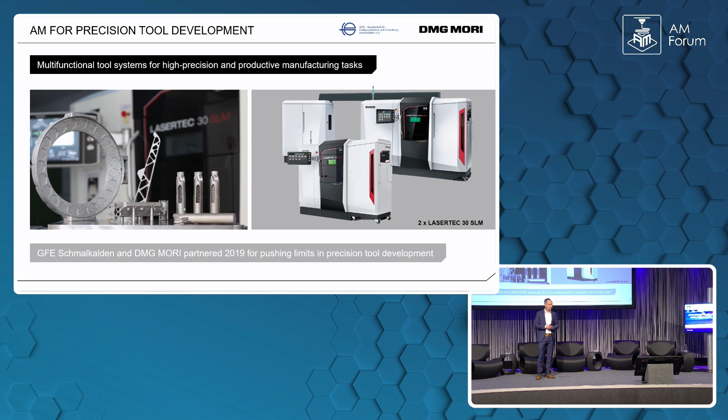Therefore, we have, I have to say, a huge shop floor. In this shop floor, we have around about 25 machine tools, and among them, as Mr. Lell said, 2 LPBF systems. These are the LaserTec 30 SLM. And what you can do with them regarding the performance optimization of tools, I will show you on one example,

more or less. This is a power skiving tool, and when we are talking about tool performance, we have to ask the question, how can we measure the performance? And that could be even measured in productivity. So for high productive tools, you need stability, you need rigidity, you need wear resistance, you have to focus on economical and ecological tasks of these tools, and of course, you have to look at precision. All these aspects I try to put together in one demonstrator.

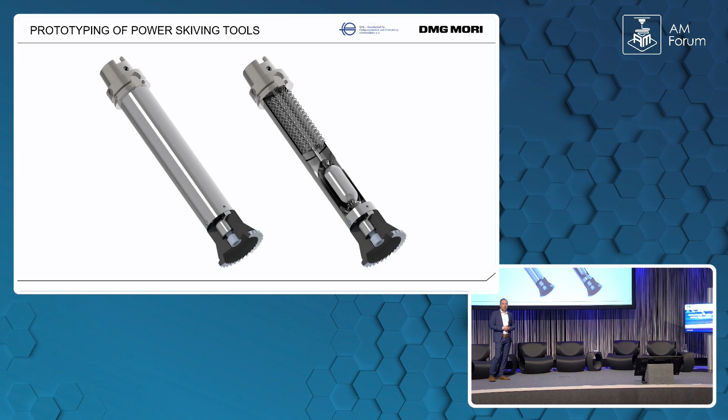You can see on the right-hand side, there are different optimization tasks we can follow on the road to optimize these tools. I will go on, and this slide is maybe the key of my presentation. Here you can see the different opportunities, and that's what every tool supplier is interested in. Having a look at the first area, that's the tool interface. And the tool interface in this case is an HSK. Standard tool interfaces to clamp the tool on the spindle or the tool holder, etc.

These are standard parts, and when we're talking about standard parts, you don't have to print them. So in this case, we have to think about hybrid manufacturing. It's a topic that's not new, but that's our task. We're thinking about hybrid manufacturing in the context of additive, subtractive process chains. In this case, subtractive, additive, subtractive process chains.

The next part of this tool is the tool shank. Here, I guess we have the very innovative topic on that. It's first of all lightweight construction, lightweight design. That's an issue regarding economical tool design, of course, and the other part is function integration. Here we're trying to implement damping systems, and I would like to talk about that later on a little bit more in detail.

Then the last area is the tool head. Of course, you can see some topology optimized tool heads with cooling lubricant supply outside. For example, the company Sandvik has presented these heads. I won't talk about that. That's from its stand. It's state of the art.

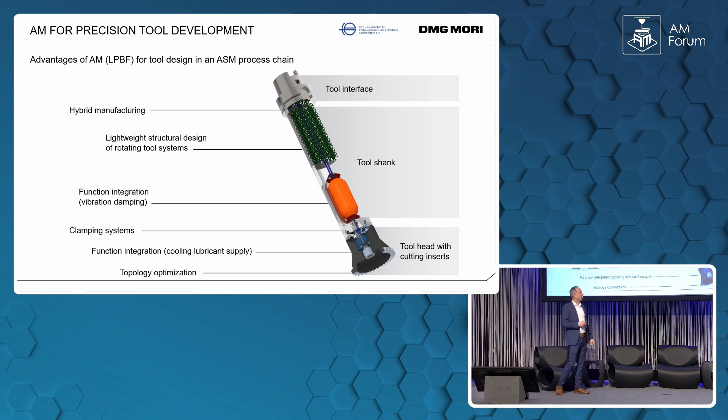But really interesting are clamping systems. And here we're talking about hydraulic clamping systems, and that is a really benefit for damping and, of course, for time-consuming tasks in machining. Okay, so these are several projects, and I will just highlight some topics.

Hybrid machining. So when we're talking about hybrid machining, we are using zero-point clamping systems. These are thermal zero-point clamping systems from the company PL Lehman. It's really beneficial. You can put the build plate from the SLM machine to a 3, 4, 5 axis machine tool, and so we are really productive. But if you want to go on in hybrid, you have to mount, for example, these tapers, HSK, what you see in the middle of the picture.

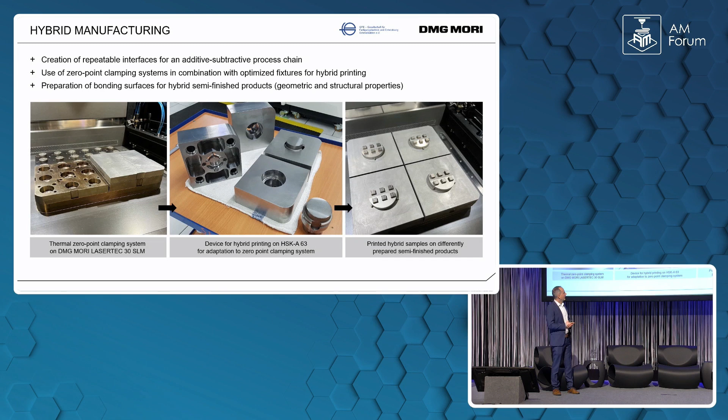Therefore, we have designed a special device. We can put them in the middle, and we did some R&D on the optimization of hybrid manufacturing. That means how we have to prepare the joining surface. That means we have to generate a certain RZ value or roughness. I can recommend the RZ between 2 up to 6 micron. That's really beneficial. Of course, no glossy surfaces.

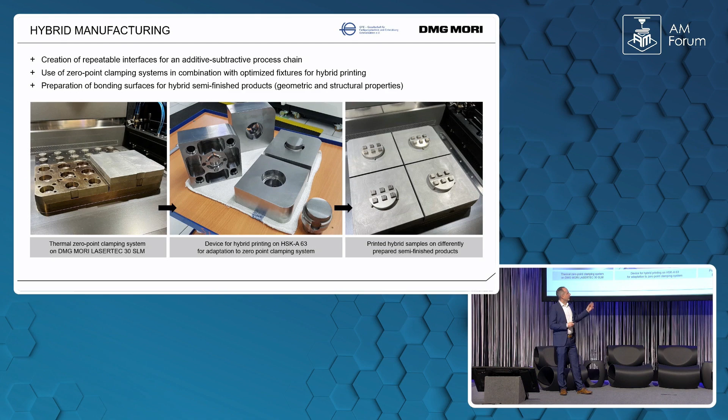You might know that. On the other hand, it's interesting to have a look on the joining strategy. That means how to scan the first layer. That's really important. Here you can recommend a multiple scanning strategy, but then it will work. On the other hand, the next question is how to ensure the right positioning. I will just show you this slide where you can see we have developed a certain positioning strategy.

It's a calibration strategy where we are marking the build plate, and we are measuring these marks, and so we have a deviation, and we compensate this deviation by a Python script we wrote, and so we can shift the component within the software. And here, by this task, we can achieve a precision or accuracy of around about 10 micron.

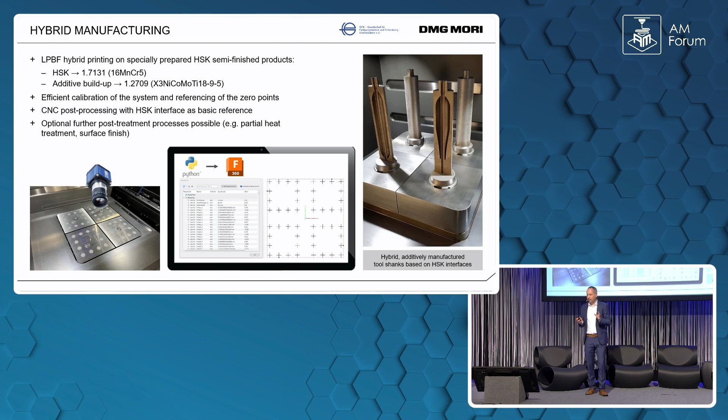That's what we could do in a laboratory, but I guess it's this direction what could be also done in industry. I heard it's really challenging to do this, but with our device and so on, it works. The whole calibration technology will last around about half an hour up to an hour. That's not that beneficial, but for precision, really good.

Next part, just to give you a clue of what is inside of the potential, I would say, lightweight construction of rotating systems. I would say highly dynamic rotating systems, around about 20,000 RPM. We have devices to test tools up to 100,000 RPM. In this case, we had the challenge to minimize the weight up to 50% by no significant reduction of rigidity or damping aspects. That's a really hard task, you know, you are shifting the eigenfrequencies and so on.

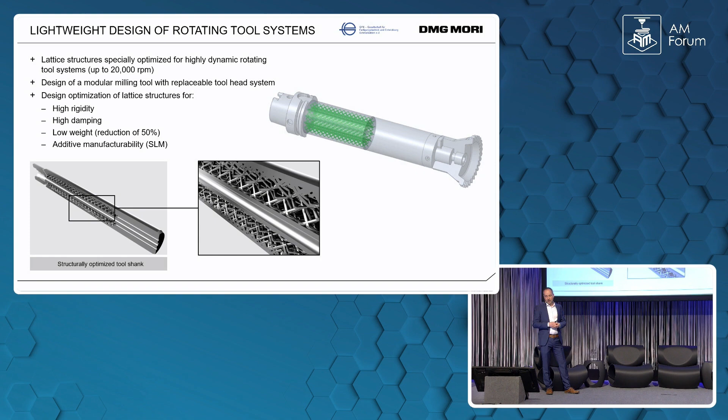But the main topic on that project was to use the lattices, the lattice structure, design lattice structure, and you might know that you have to deal with big data, in this case for the CAD models. So we want to use scalable models or implement scalable models and to define design rules. Even printing these lattices, some aspects on the dimension. There we can see 200 micron is really beneficial for these lattices.

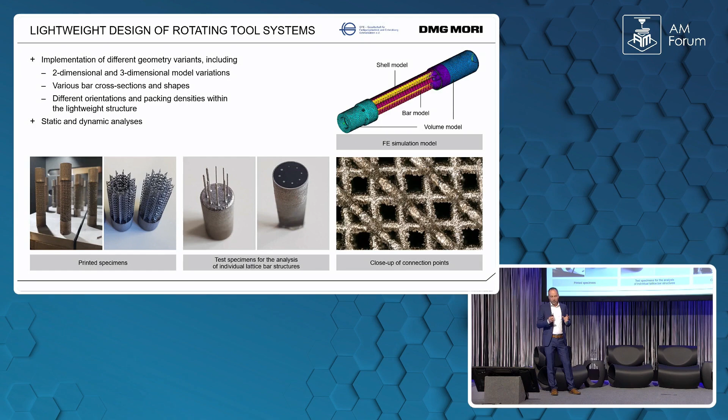We tested them, simulated them together with an R&D institute, and then we printed these specimen, these prototypes, and tested them really static and dynamic. And I have to say, it works, but you have to look at the dynamic stiffness. That's really a problem. And to compensate this, I come to the next part. You have to use damping systems.

A lot of modular tools in the market. There are, on the right-hand side, you can see, mounted with some dampers. You can see in the middle, it's a damping mass. Then you have the bearings. These are elastomeric bearings near the tool head. And by applying an axial pressure, you can pre-tension these bearings, which means you can shift the eigenfrequency, of course.

And the challenge was, or vision, aim, I know it's a running project, to implement this as a function integration in a monolithic tool. You can see on the right-hand side, and the solution to create a mass, no problem, to evacuate the powder, no problem, but how can you create elastomeric elements by a metal printing process?

Therefore, we are thinking about solid-state joints. These are springs, what you can see on the right-hand side. That's even no problem without lattices and so on, a support structure. But the other topic was how to pre-tension these springs. And here I can build a bridge to the next step, as I said. It's hydraulic actuation. In the middle of the picture, you see these chambers, pressure chambers. We applied them just to pre-tension each of these springs, and therefore to fine adjust the damping properties.

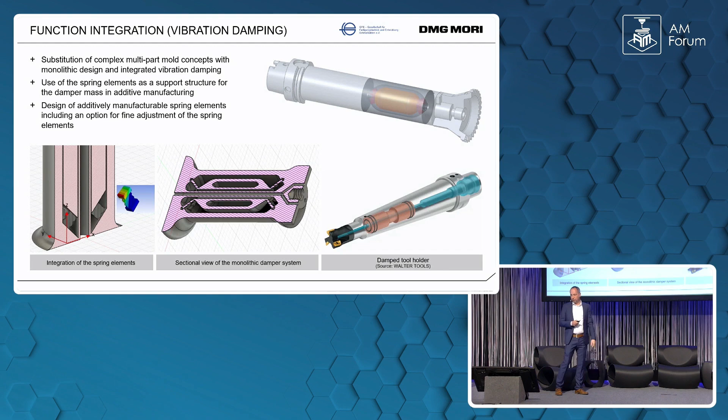That's another aspect, how we can use hydraulic pressure within tool systems. You can see them on the market. These are standard chucks from companies, for example, Walter or Mapal. They are supplying them for these hydraulic expansion systems. But is it possible maybe to invert them? That's our question in our running project in this picture for really small interfaces, and even use them for really complex clamping situations.

And that's what, last but not least, I want to explain in a result of a project on the right-hand side that was called backlash-free indexable cutting seat. Here you can see that you're using a standard ISO cutting insert for fine turning, and these seats were loaded multiple times from different directions, and within a long cycle time, the insert seat is wearing. So that means you have slight movements, micro movements of this cutting insert, and that's not really beneficial for the process.

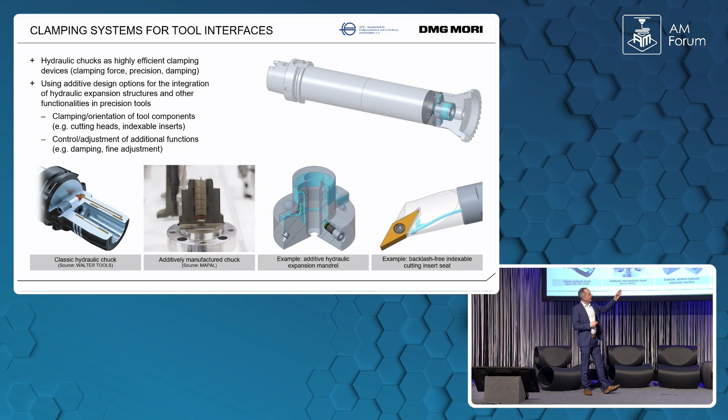Then we thought about how we can compensate this micro movement by a hydraulic pressure. Therefore, we designed a certain actuation. You can see this chamber over there, and I can show you on the last slide the real tool. So we were applying hydraulic pressure, so we can fasten the plate, showing a really high clamping force on this plate, and so the process is really working well.

And this project we used for generating dimensioning and designing rules to create these pressure chambers regarding stress-strain curves and so on, pressure-strain curves, dimensioning of the channels, the chambers, and so on. So you can do a lot of good things, I would say, for the improvement of tools. That's just an inspiration. I'm fully in time, so I will hand over to Mr. Lell. Thank you.

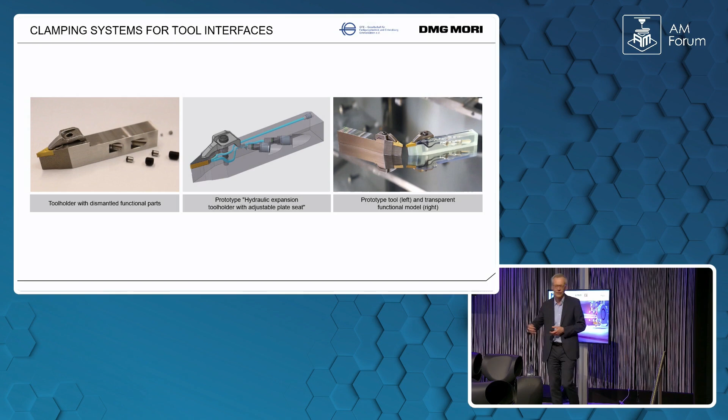Yes, thanks a lot. First of all, when we discussed this presentation, I thought about coolant channels and topology optimization. And Florian Welzel said, yeah, but that is state of the art. That's nothing innovative. So you see, it goes much further with hydro chucks, with internal damping. And also from the machine side, we have taken a step forward, and we have looked at what is really required from the industry if you want to go into production of those kinds of parts or precision parts with additive manufacturing.

And so I think we need a completely different approach to the machine. We need a high accuracy inside the machine. Also, the accuracy of the process is limited. It gives us the base for long-term stability and the reproducibility that you are used to from DMG MORI and from other machine tools. Everyone knows he can put a part on a machine tool and he gets 1,000 times the same part if he does it the right way.

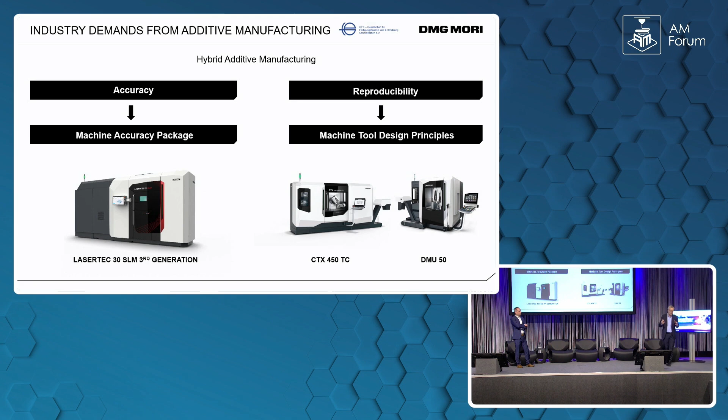And now with our new, actually third generation machine development, we have applied all these machine tool design principles to additive manufacturing. And this gives us the base for the future in terms of accuracy, in terms of reproducibility, in terms of having one machine like the others getting the same results, or if you do the same part after half a year, you should get the same result again without trial and error the first time, right? That's the idea here.